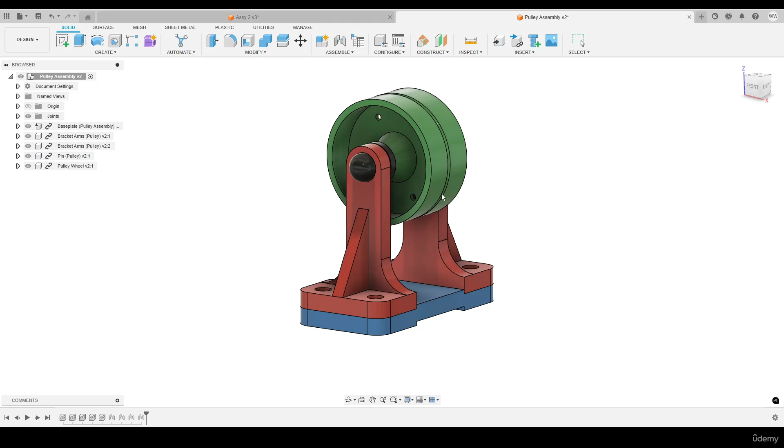Okay, so at this point we've used joints to assemble each of our individual parts. Everything's looking good there. We've got the pulley wheel rotating like so, with everything else being rigid. There's just one more thing to add then, which is the fasteners, which go in the holes here. And I'd like to show you one of the built-in features within Fusion, which is to insert fasteners.

Go back on the home view. I'm going to come up to the tabs at the top. I'm going to go under Insert. I'm going to select Insert Fastener. You can hit the drop down, second one down there. Let's go Insert Fastener. Then from here our toolbox pops up. We can do a search for fasteners from there.

You can also select some viewing options, so whether they're listed or tiled. For me personally, I prefer tiles, so I'll leave it as that. We can then filter as well, so we can filter by a standard. We can also filter by the unit system, so imperial, inches, metric, mil. For me, I work in metric, so I'm going to leave it as metric. And under here, yep, we're looking for fasteners. And in this particular case, let's start off with some bolts.

And we've got various options here. So the countersunk, flanged hex. Instead of going for a flanged hex, I'm just going to go for a hex. And then I want to insert washers as well and show you that option. So I'm under the hex head fasteners. We've got options for self-tapping, sheet metal shoulder. Then we've got various options for hex head bolts here. I'm going to go with the very first one, just as an example. And then we have quite a lot of parameters that we can adjust.

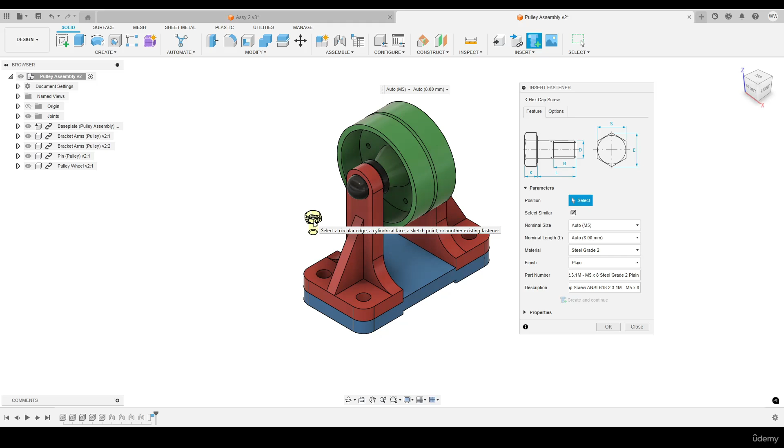Now what's great about Fusion, and what I really like about this feature, is that where we move the mouse point, Fusion will do its best to pre-calculate what the size of the fastener will be. For example, if I bring my mouse over this hole here, okay, so that orientation is not what we're looking for, but if we move the mouse slightly, it will then recognize the correct orientation. And it will also put in fasteners like we see on the other side as well, which Fusion will see as being similar. And we don't have to do that if we don't want.

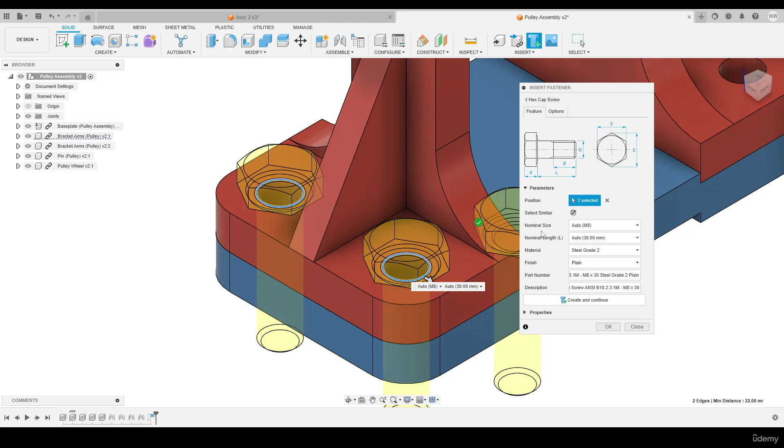So under Select Similar, we can take that off. And if we come back, it will just do the one here. But in this particular case, I do want to have the same fastener in this hole as well. So if we adjust this down like so, and left click once, then we can adjust the parameters here. So Fusion's recognized the hole size and has assigned this M8. You can adjust this if that's not accurate, but in this case, M8 is good for us.

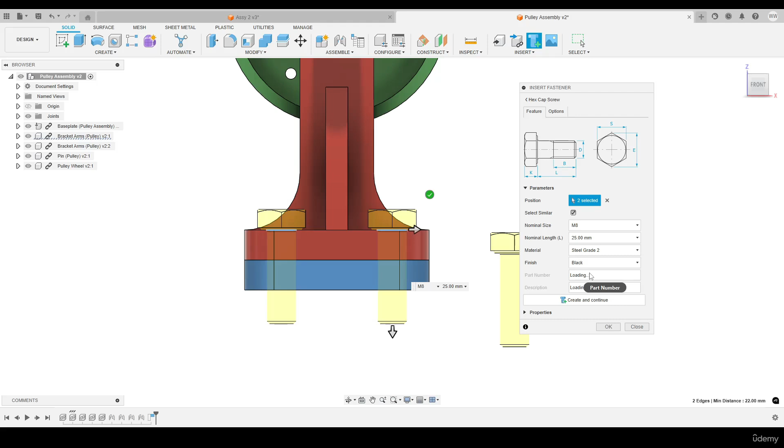In terms of nominal length, Fusion now has input 30. Let's go on the front view. Yeah, 30 is okay. It's a bit long. We can get a nut on there with these. Let's go for 25 mil. Happy with that. Under material, we can assign a material here: stainless, aluminium. Going to go for steel. Under finish. Let's go for a black finish. And then once we're done with that, let's click OK.

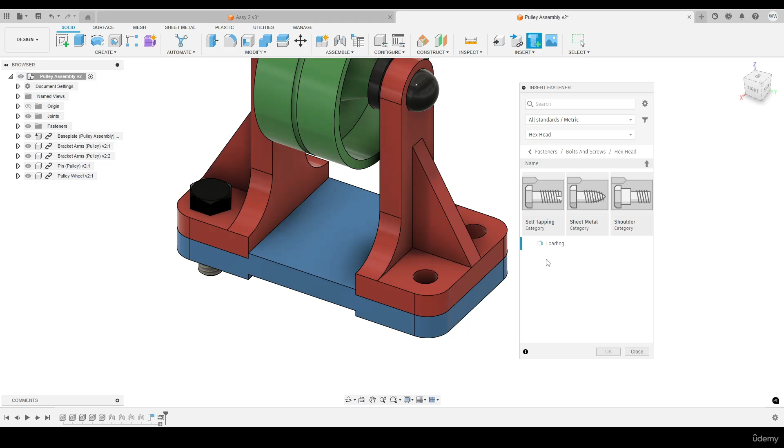Then you'll see that Fusion has input the two fasteners there as per the parameter boxes, and they've applied a visual thread as well, so not a physical. And we need to repeat that process for the other side just here. Let's insert fastener. Again, let's go bolts and screws. Let's go hex head. I'm going to pick the first one again as an example. Hover the mouse over, click once. And then I'm going to adjust that to 25. And for the finish, I'll put that as black as well. Then press OK. And then we have 4 hex head bolts put in place.

That's nice. Let's also add some washers there as an example as well. Let's go back on Insert Fastener. Under here, let's choose the washers folder. Do we want a plain, a spring washer, or a square? So this is M8 bolt. Spring washer under that torque would do very little, so let's go for a plain washer. And I'm just going to choose the first one as an example again.

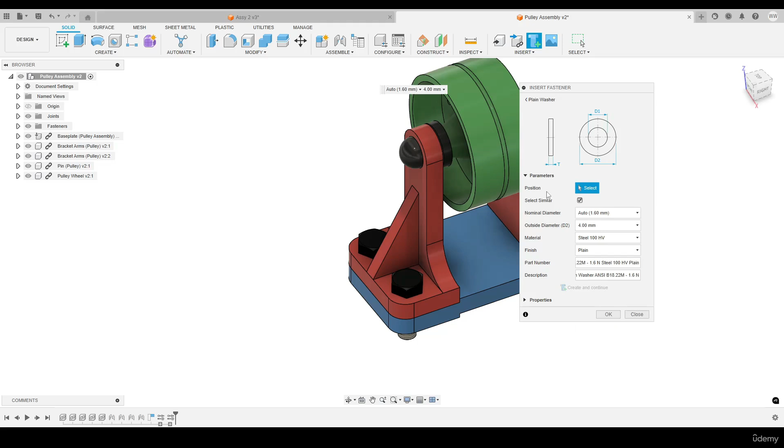And it's the same process. So I've got Select Similar selected. I'm going to hover the mouse over. And then when I click once, I then hit the green tick here or press OK. Fusion will adjust that bolt so that it then sits onto the fastener, which is a really nice feature. And perhaps at this point, we might want to revert that length to 30 mil, as we haven't got much length on there for a nut, which we'll do in a second. Okay, and Fusion's applied washers to all 4 of those.

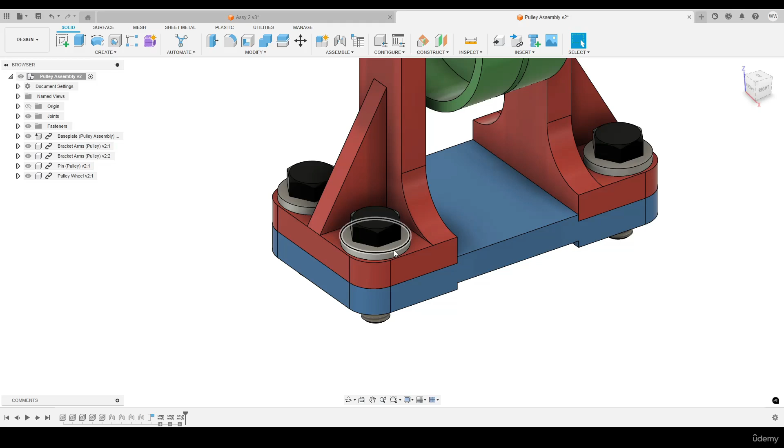That's fantastic. If we want to change any of the parameters about these fasteners, let's say, for example, we want to change the washers to black, come down to our timeline, you can just simply right-click on the feature, edit fastener, go on the finish, let's put that as black, press OK. We've adjusted that, that's nice.

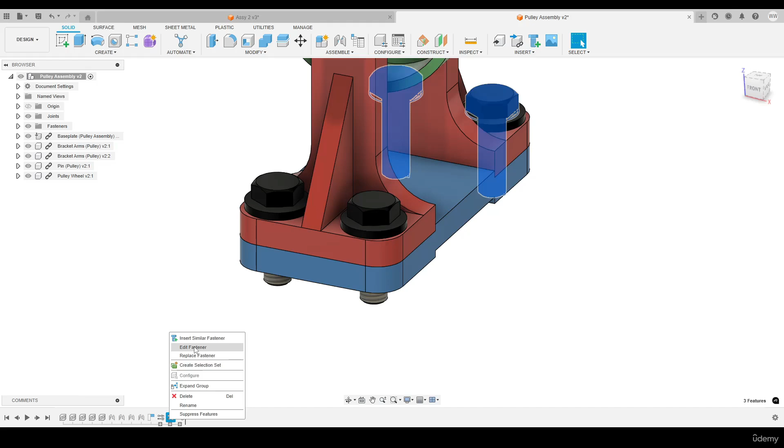And let's also add on another 5 mil, so let's go for that 30 mil on the fasteners. So I'll come down to that feature there, edit fastener, put in 30 mil, and that's going to do these 2 over here, press OK. And repeat the process for this feature as well, which is these 2 bolts here. Go 30 mil, OK. And there we go. That's how we make use of this brilliant feature built into Fusion.

In my experience, a lot of the calculations that Fusion does in order to auto adjust the size and length of fasteners is actually really good and quite accurate, but at times we do need to implement some manual adjustment to get exactly what we're looking for.

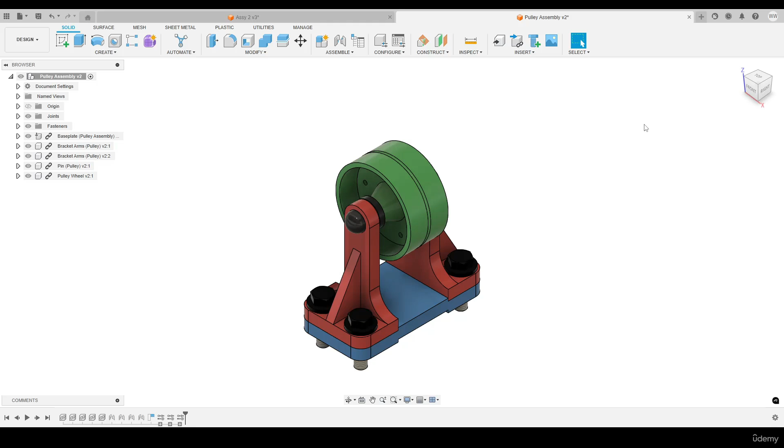Any questions about that, please send me a message, and I would recommend having a play around with the insert fastener toolbox. Plenty to choose from, lots of different variations according to standards, etc. And overall, really useful and efficient tool. Saves us a lot of time when it comes to generating and assigning fasteners as well.